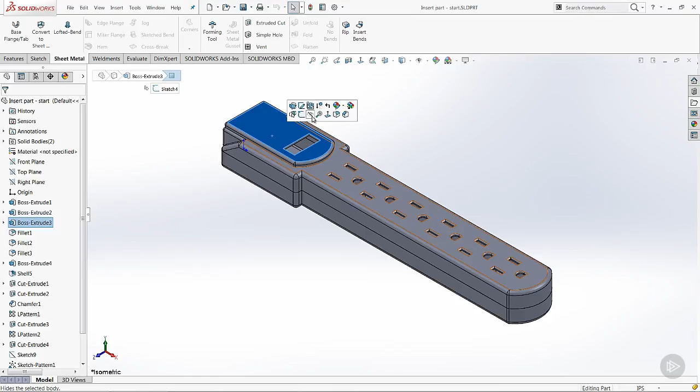Welcome back. This is our first video in our second session on actually using multi-body parts as opposed to creating them. We're going to take a look at a couple tools along with this power strip model that we've been using some and see what we can do. I'm going to come in and hide this top body and kind of go from there.

We've got a model of a mounting boss that we use in a lot of our designs, and we're going to reuse it. Or at least that's the idea we're going to go with. We're actually going to come in and say insert part, and we actually can bring another file into this file. Not quite an assembly, but some of the similar ideas. So I've got this mounting boss that we want to stay consistent with all the other components.

And we got a couple options over here in the insert parts dialog: solid bodies, surface bodies, all the way down to model dimensions. But I do want to come in and turn on the move copy feature when I get this inserted. I can break a link to the original part and propagate any visual properties from the original as well. I'm just going to say OK, and it's going to throw it in and align the origins.

Now I've got a couple options. I can add mates, much like I would see at the assembly level, or I can come down to the translate rotate button and actually move the part around as I insert him. So maybe I'll do that first. I'm going to come in the X direction, kind of move him down, and then maybe in the Z direction, move him one way or the other way.

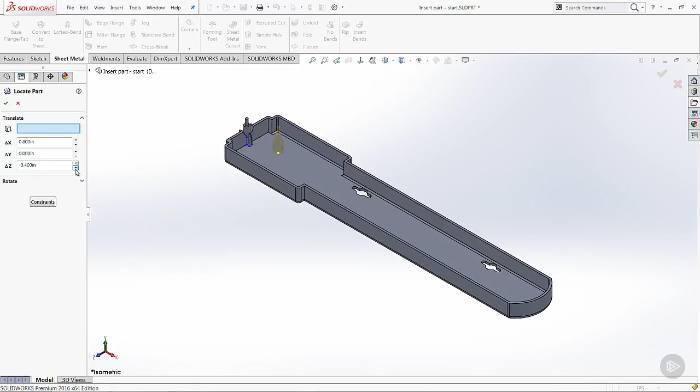Now, where do I need to position him? Well, I might have some design intent that I want to keep with this. In our case, maybe we come into a wireframe view. We just want to stay away from our hole there on the bottom side. So I'm going to come in and move him a little bit further down and a little bit closer to the back wall. Maybe something about like that.

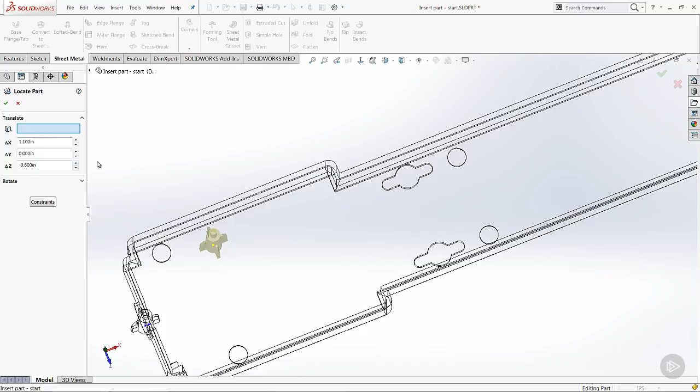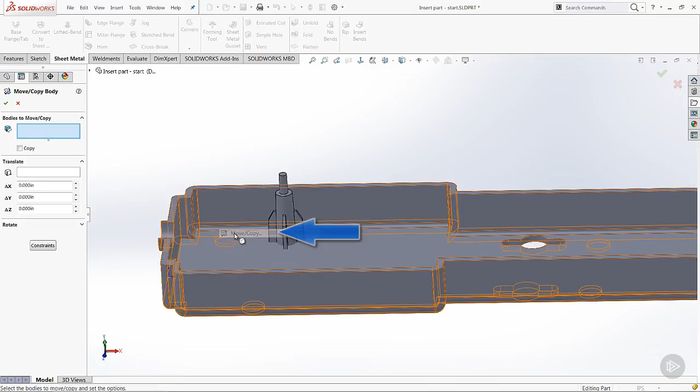And say OK. Now, if we look at this, looks like our part is kind of embedded down in the main body of our power strip a little bit. So instead of that being flush on the bottom, maybe we need to move him up a little bit. So let's go back to the insert features, move copy again. In this case, I'll come in and move this guy. I can move him up in X, Y, or Z, but I'm not sure exactly how embedded he is there. We're going to come in and use the constraints option instead.

We can add mates, much like at the assembly level, and I want to come in and mate the bottom of that mounting boss to the top side of the surface. Problem is, right now, both of those faces are nice and flush. So I'm going to show you another tool. If I come in and right-click on this face, I can say Select Other.

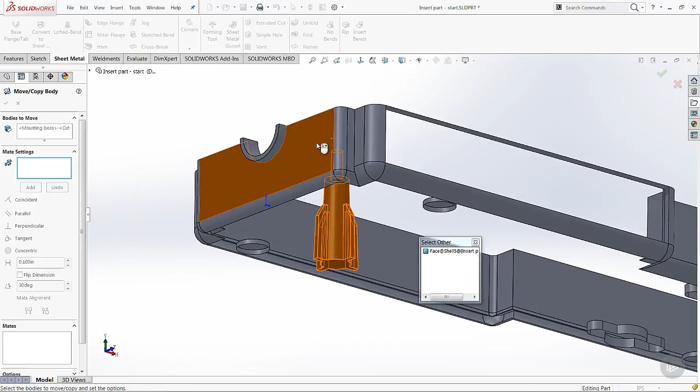So that face that I initially selected goes hidden, and if I continue right-clicking, I can come in and continue hiding faces that may or may not be in the way. With a left click, though, I can come in and select the face that I actually want to pick. So that bottom face now of our mounting boss. And we'll come in and choose the top face and add that coincident mate, making things nice and flush.

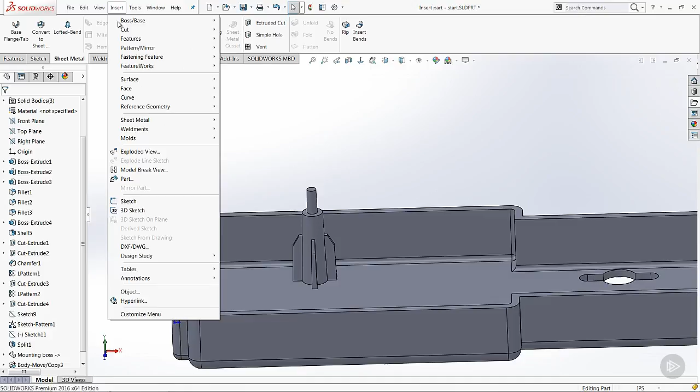Okay. Insert, features, move copy again. Come in and pick the same body. This time, instead of adding more mates, we're actually going to translate this body and make a copy. So if we come in here, we can graphically grab these by the handles or type in dimensions over in the property manager tree. So drag him down here a ways.

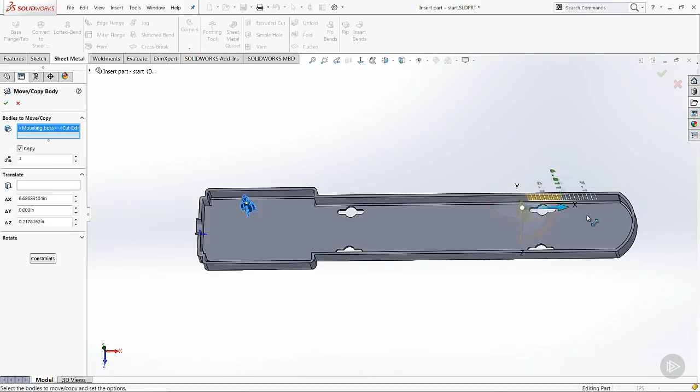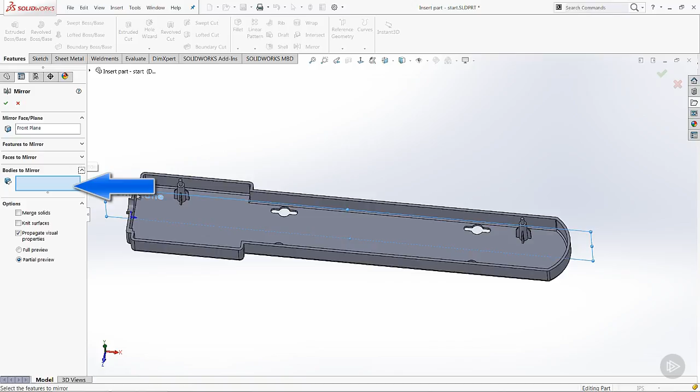Make sure it looks like there's some good clearance on the side. And instead of this being weird numbers, we'll say 8 inches and 0.2 and say OK. So I've got another copy of the body in the part there. I've got a plane that runs right down the middle of our part. Select on him, come in and mirror. We don't want to mirror features, we want to mirror the entire bodies. These two guys. Say OK.

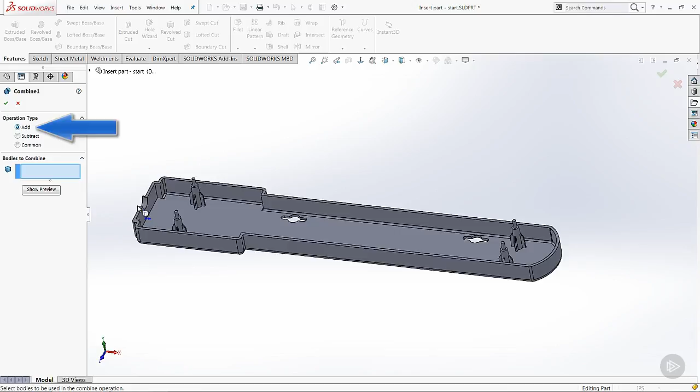Now we've got 6 total bodies. We actually want to glue these parts together. Insert, features, and combine. Now the combine has a couple different sides to it: the adding together, subtracting, and common. For now, we're going to start looking at adding. We actually want to take the base and our 4 mounting bosses and glue those all together into one single body. So now we have the bottom and come in and show the top.

Okay, so just another interesting way to work with multi-bodies, inserting parts into other parts, moving things around with the move copy body, and then the combine tool to add things all back together.